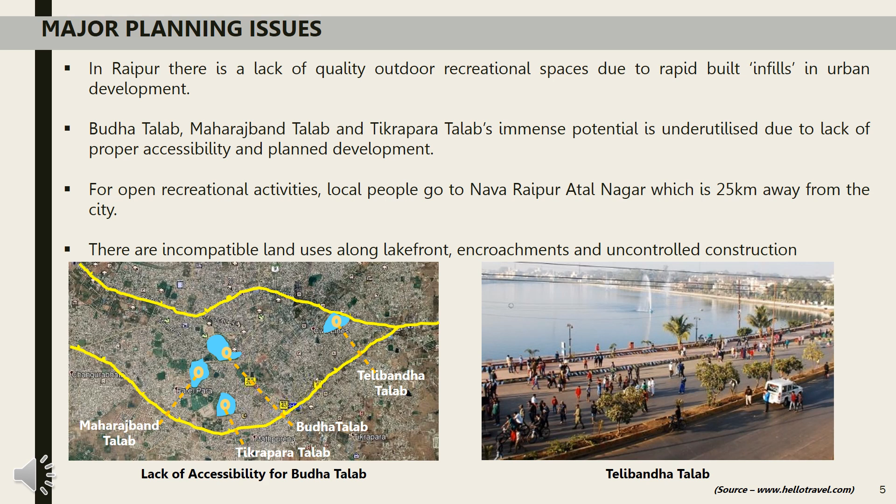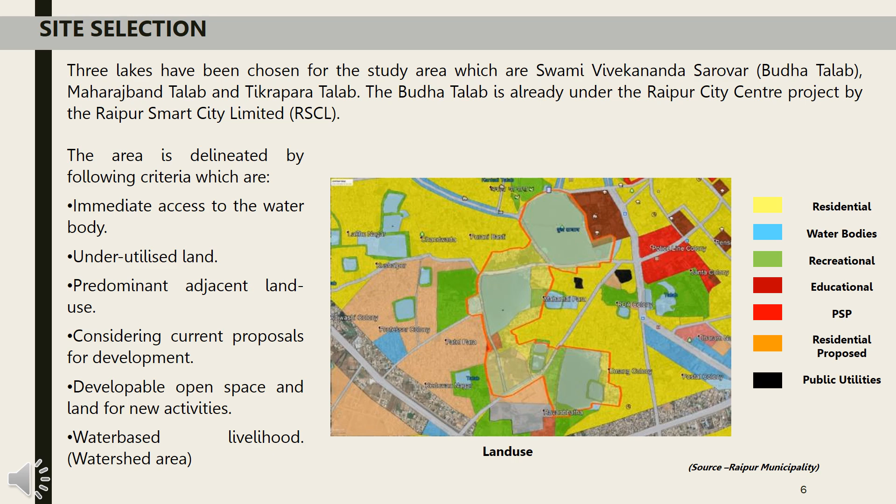The planning area is shown in the red boundary, which was selected considering criteria like adjacent land use, presence of underutilized land, immediate land-water interface, and proposals for development in the future. The aim of the thesis was to develop the three lakes into a tourist destination, following a systematic approach by planning outdoor recreational activities and urban design solutions.

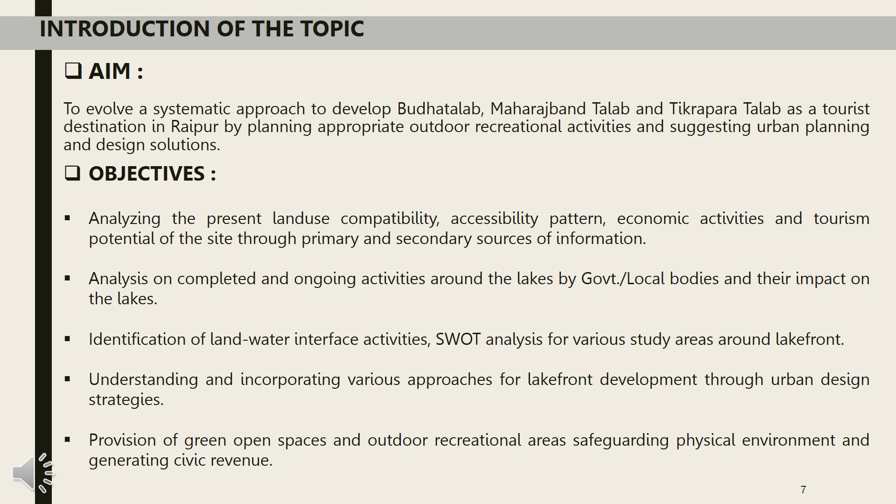The objectives to achieve the aim include analyzing the present land use, site potentials, study of completed or ongoing projects, data collection and analysis, and finally provision of green spaces and recreational areas. Scope of the thesis involves strategic measures, improved accessibility to the lakes, utilization of potentials and preparation of broad level plans with some detailed action area plans.

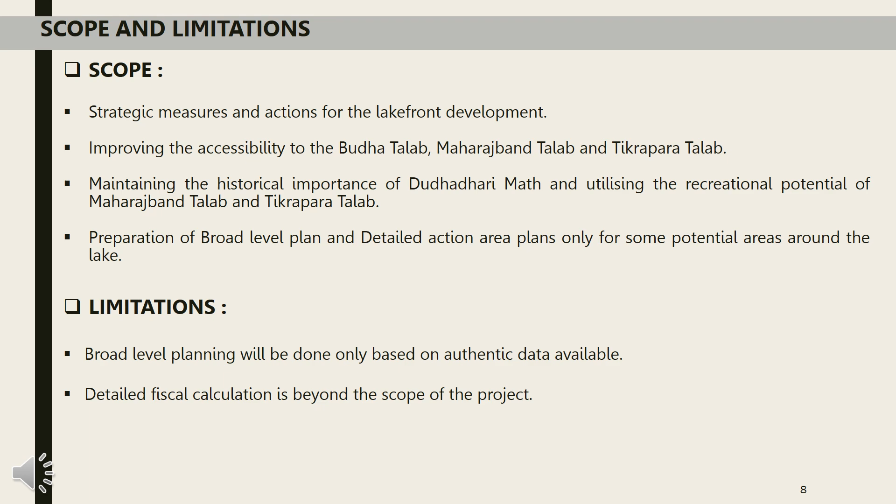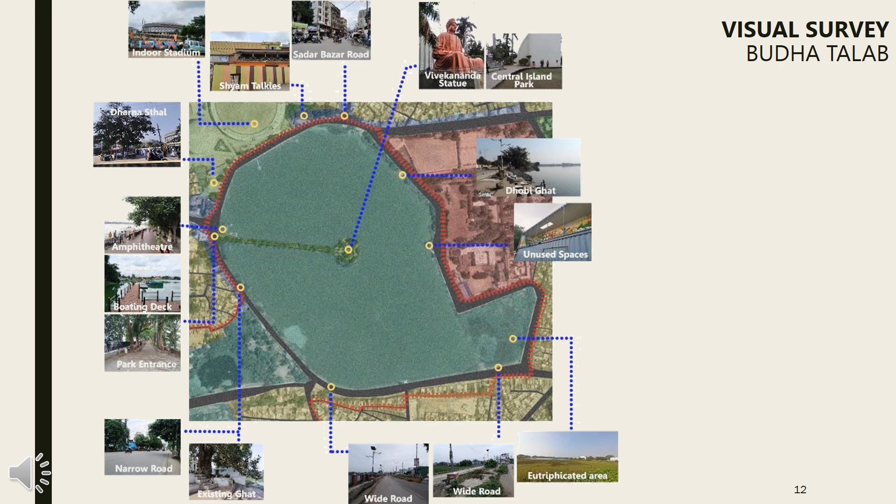This is the visual survey around Budha Talab showing the existing situation of the place. As we can see, the lake is already an attraction point for visitors with the presence of Central Island Park, indoor stadium, Shyam Talkies, boating deck and walkway around the lake. This is the visual survey for Maharajband Talab. The area is mostly surrounded by residential development and has Dudhadhari Math at the south.

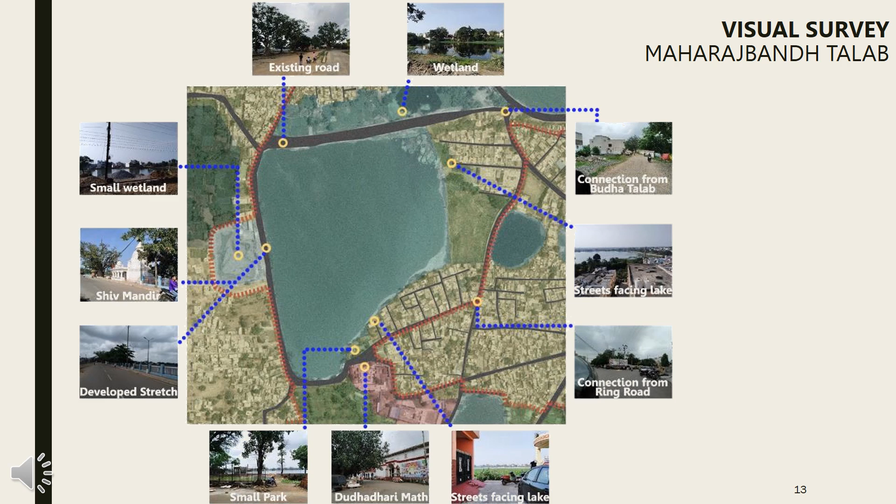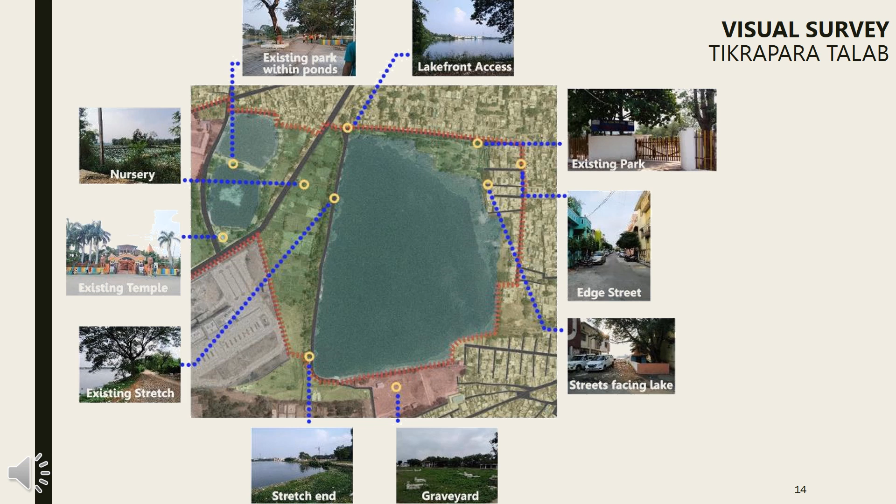The existing scenario of Tikrapara Talab is also similar to Maharajband Talab. Its condition is worse than the other two lakes due to no development around the lake, followed by low visual and physical access. It has an existing park at the north and a graveyard at the south.

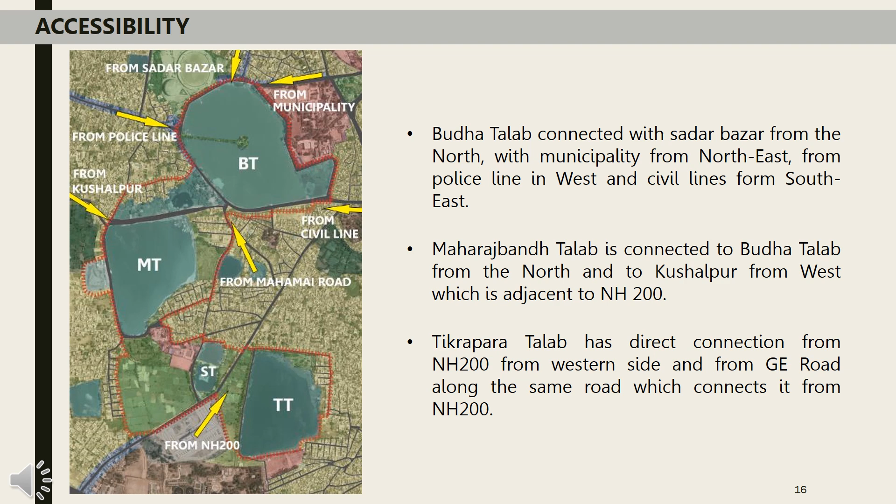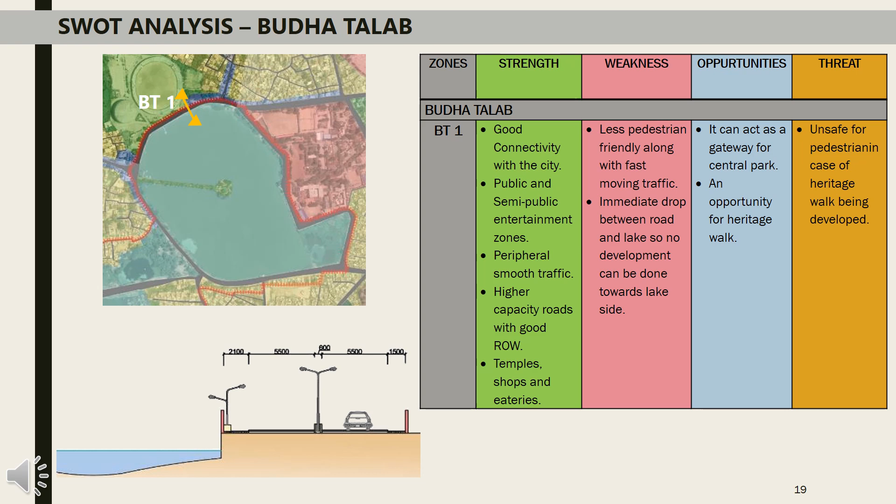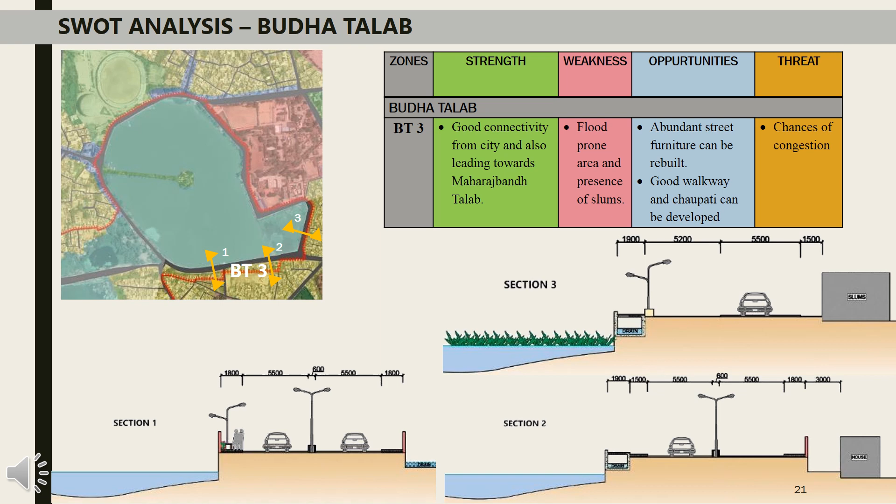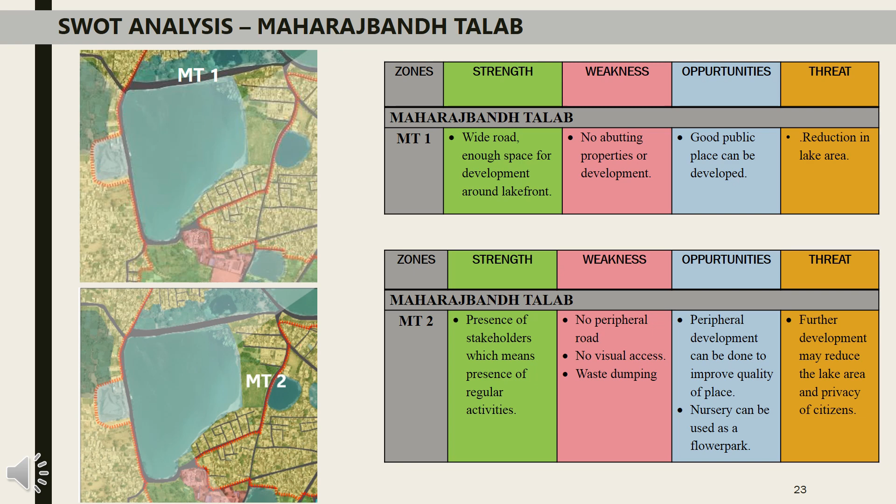After data collection and visual survey, SWOT analysis has been done for each lake. It was done by dividing all three lakes into further subzones based on their characteristics. SWOT analysis has been done for each subzone individually. These were the SWOT analyses for subzones of Budha Talab. This is the SWOT analysis for subzones of Maharajband Talab. And this is the SWOT analysis for subzones of Tikrapara Talab.

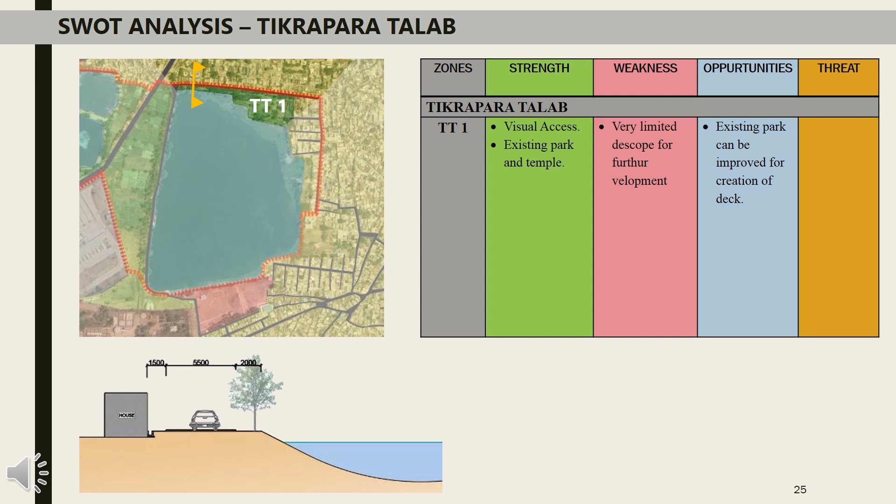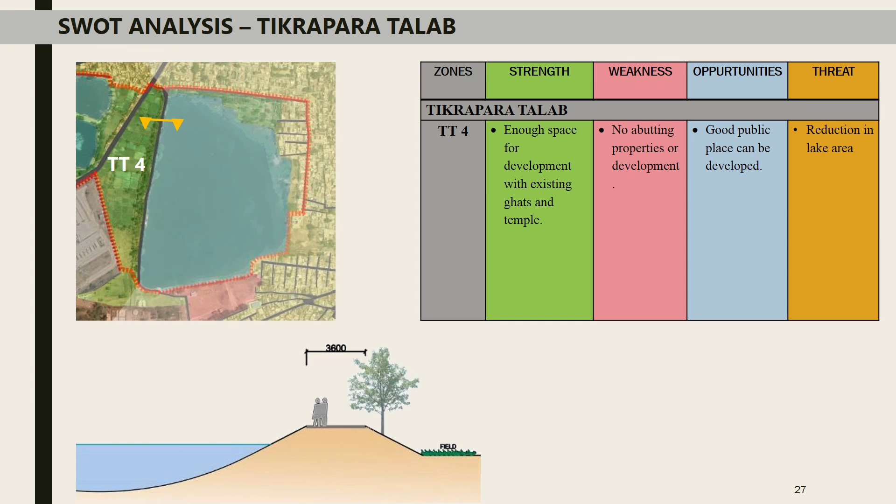Household survey near Budha Talab was taken to find out the present relationship between the residents and the lake, also to find out how they are affected by the lake being a tourist spot. The priority of development for residents are mainly improvement of water quality and solid waste management around the lake.

Household survey near Maharajbandh Talab was taken to find out the present use of lake, the major problems and future potential for various zones. The major priority of development for them is improvement of water quality and solid waste management around the lake.

Similarly, household survey near Tikrapara Talab was done to find out the present use of lake, the major problems and future potential for various zones. The major priority of development for them is improvement of water quality, solid waste management around the lake, new recreational areas and commercial area development.

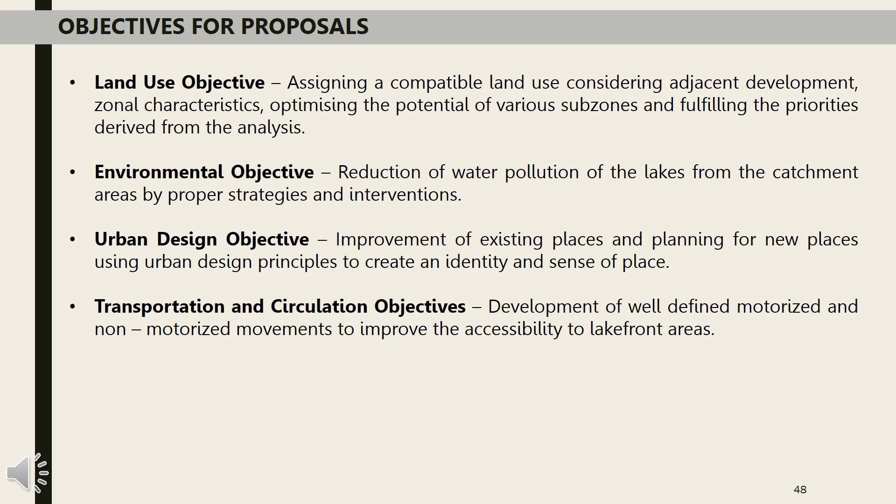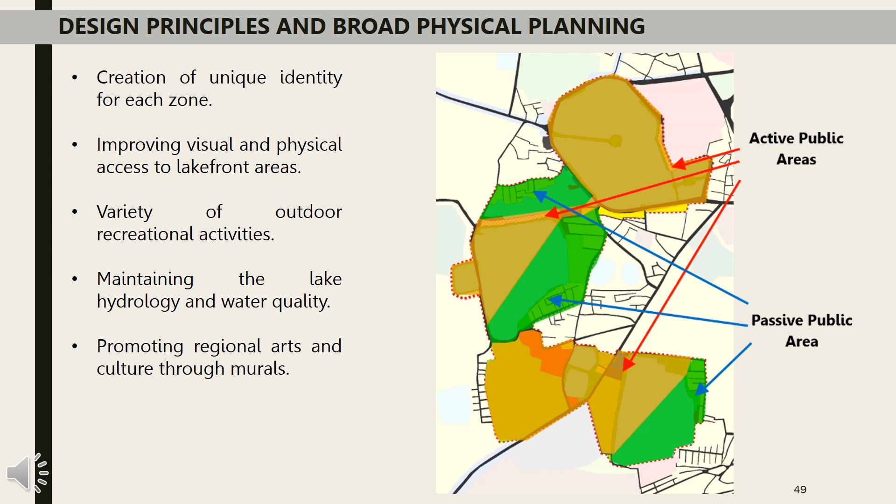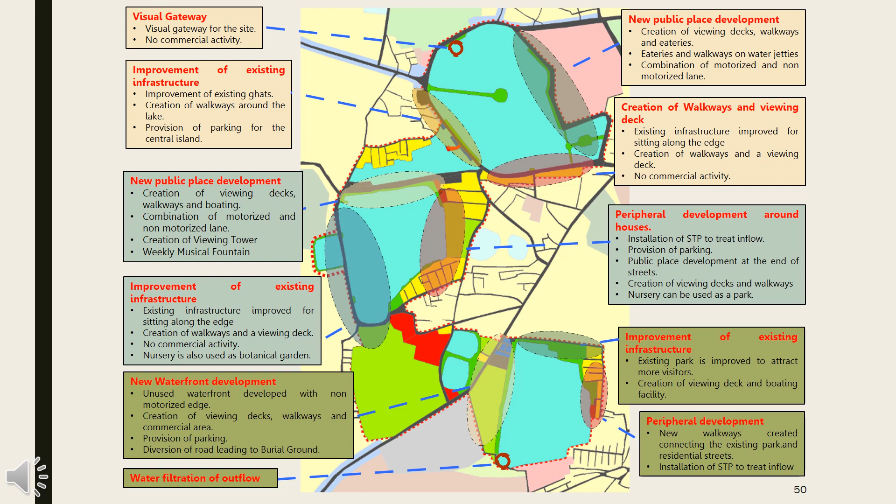After getting the preference for development activities, interventions were taken in form of proposals and recommendations. Proposal objectives were for 4 fields, which were land use, environment, urban design and transportation. Planning area was broadly divided into 2 types, active public areas with new recreational activities and passive public areas with less visitor interaction, while incorporating some design principles. The broad planning strategies for various subzones around the lakes are formulated based on data analysis. Based on these strategies only, proposals were given for each subzone.

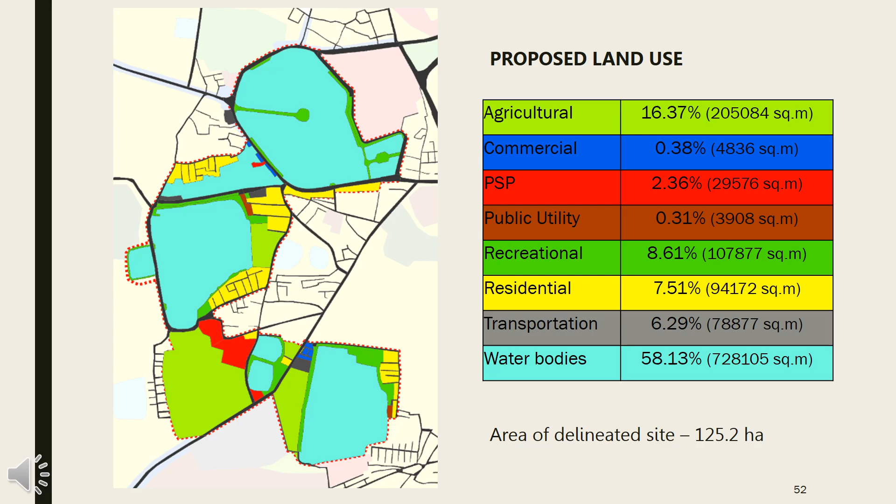In the proposed land use, recreational area has been increased along with the introduction of public utilities and commercial area. Recreational area in total increased from 1.8% to 8.6% and commercial land of 4836 square meters has been proposed. This is the proposed land use map of the planning area with share of each land use given. Development proposals in the planning area follow some development guidelines which are formed considering aspects like natural features and landform, built-up form, urban landscape, open spaces and circulation.

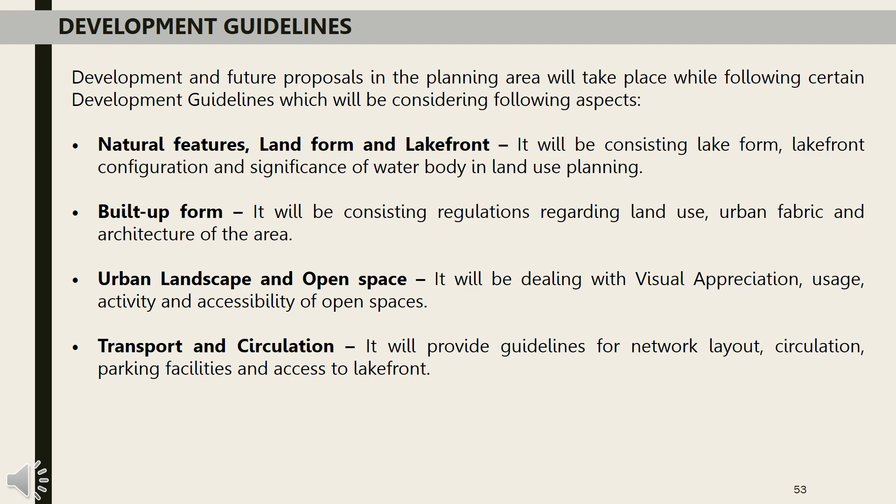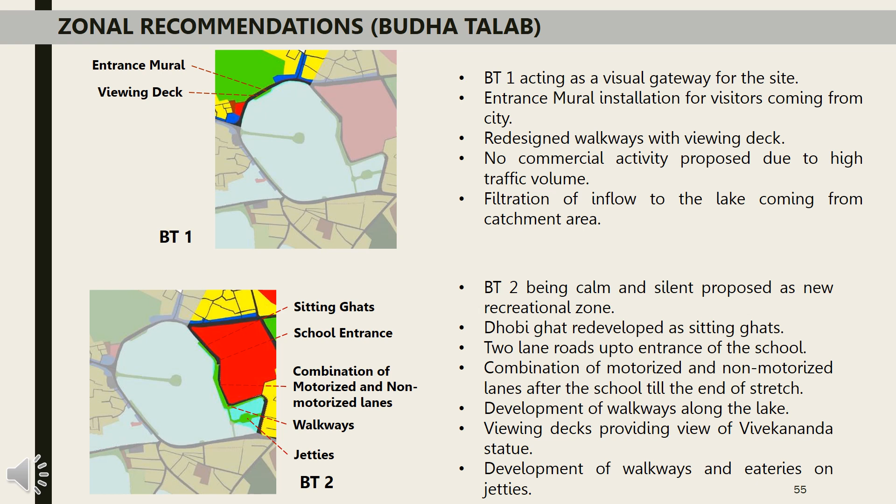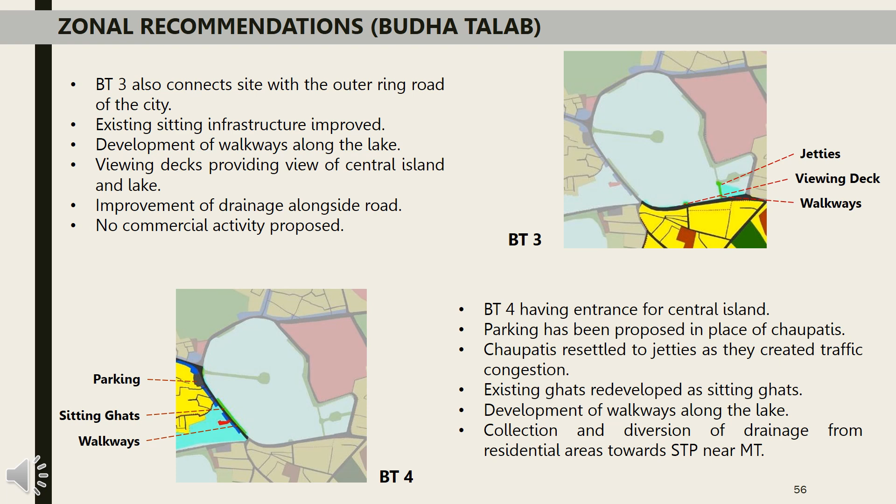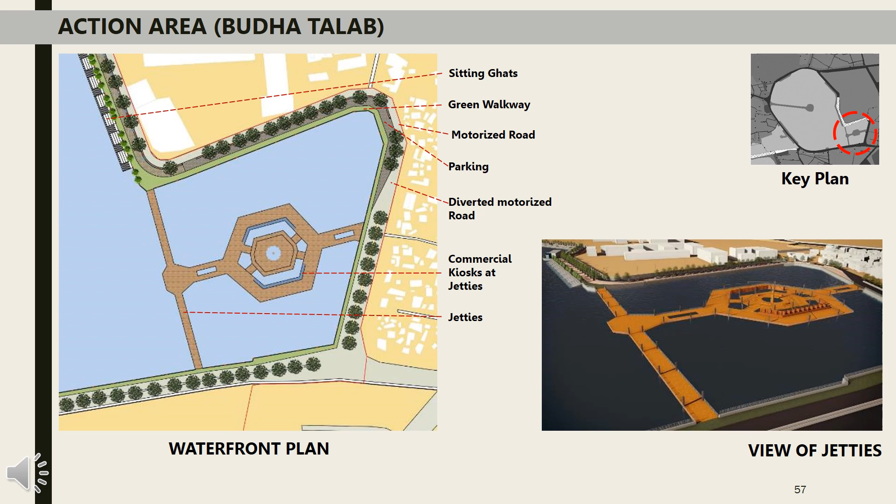Now this is the detailed plan of Zone BT2. Motorized road has been diverted to create a lane for parking. Further, that lane will be closed and will be used as a non-motorized lane along with the green walkway. The jetties constructed on the lake will have commercial kiosks and eateries. This is the waterfront stretch plan showing the sitting ghats, green walkway and commercial street. The ghats will provide an interactive experience with the water. These are the overall proposals for the Maharajbandh Talab.

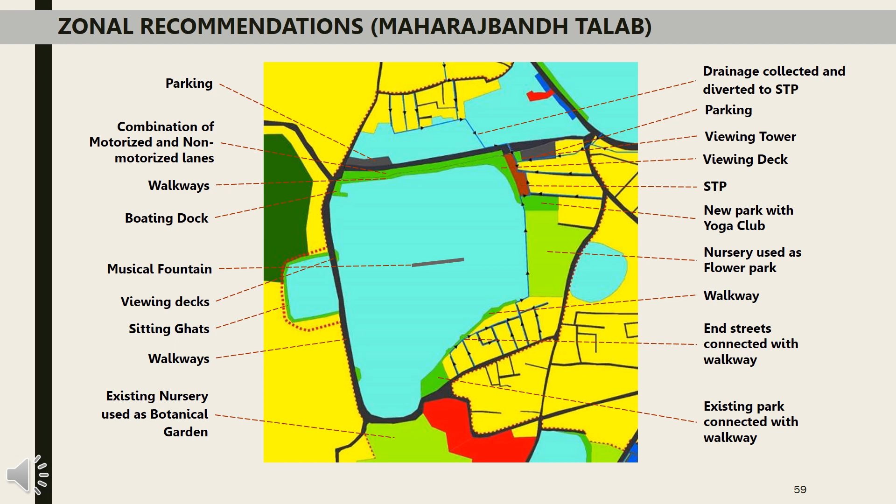In Zone MT3, existing sitting infrastructure along the lakefront will be improved with 2 viewing decks in between. The nursery present at the south of the lake can be used as a botanical garden.

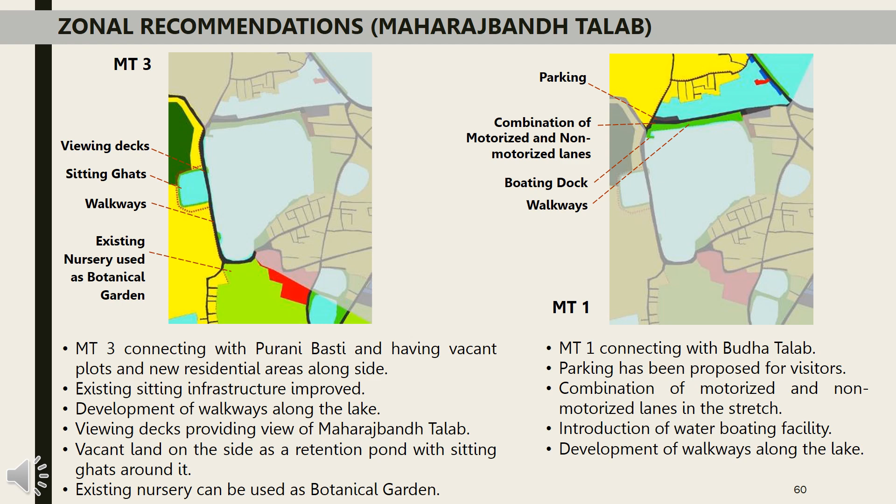MT1 will be developed as a new recreational zone with development of walkways and sitting ghats. It will also have a combination of motorized and non-motorized roads with a separate parking facility. A new boating facility has been provided in this zone.

MT2, on the other hand, has mainly residential areas, so it is designed as a passive public area. On the top of the zone, parking has been given along with a viewing tower which can provide the aerial view of the Budha Talab and Maharajbandh Talab. Beneath it, an STP has been proposed to treat the inflow coming into the lake.

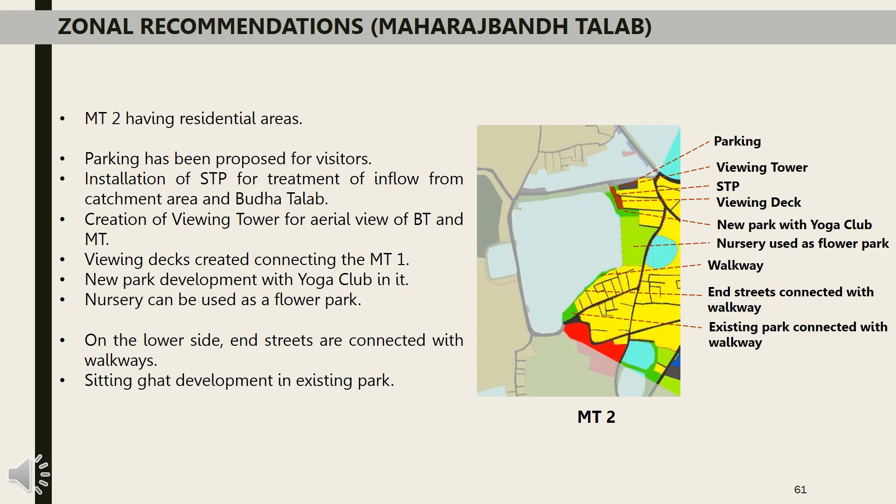Near the residential area, a new park has been proposed which can be used by the yoga club of the residents nearby. It is also connected to the walkways through a viewing deck. On the lower side, the existing park has been developed with walkways connecting the ends of the streets.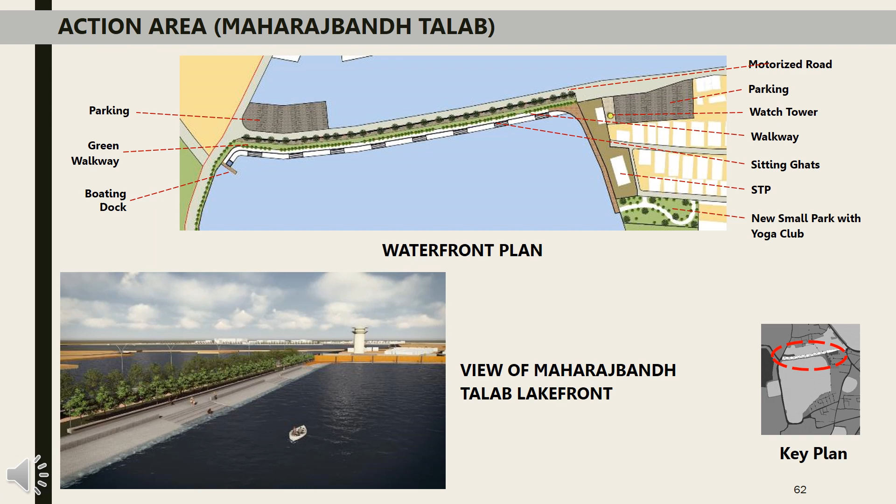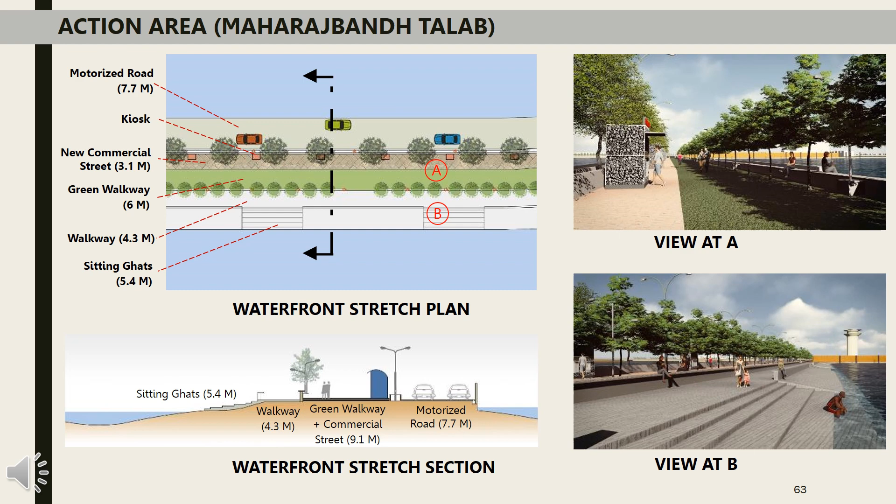This is the detailed plan of MT1 showing the combination of lanes, green walkways, parking locations, boating dock, STP and viewing tower. This is the waterfront stretch plan showing the sitting ghats, green walkway and commercial street or non-motorized lane. Similar to Budha Talab, the ghats will provide an interactive experience with the water.

Overall proposals of Tikrapara Talab include its surroundings and small ponds near Shiv Mandir at the west also. Zones TT1 and TT2 have an existing park and residential area. So here, the existing park has been developed and connected to the walkways created at the end of the streets.

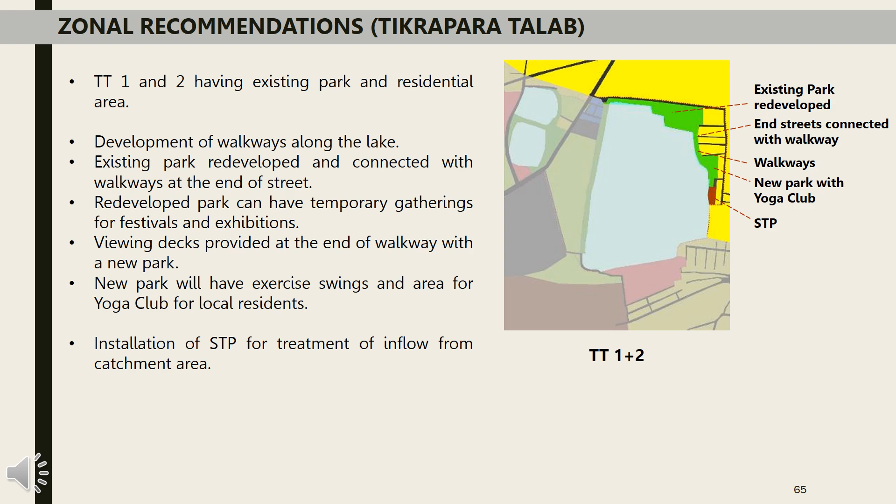At the end of the walkway, a new park has been proposed with exercise swings. At the end, an STP has been proposed to treat the inflow coming from the catchment area. Zone TT3 has a graveyard, so no intervention has been taken for that zone.

In zone TT4, first, a new commercial area has been given for residents nearby. Then near Shiv Mandir, existing parks near ponds have been redeveloped and slums were resettled to improve visual access. On the Tikrapara stretch, a new lakefront has been proposed having its access from the main road. The entrance will have a parking facility.

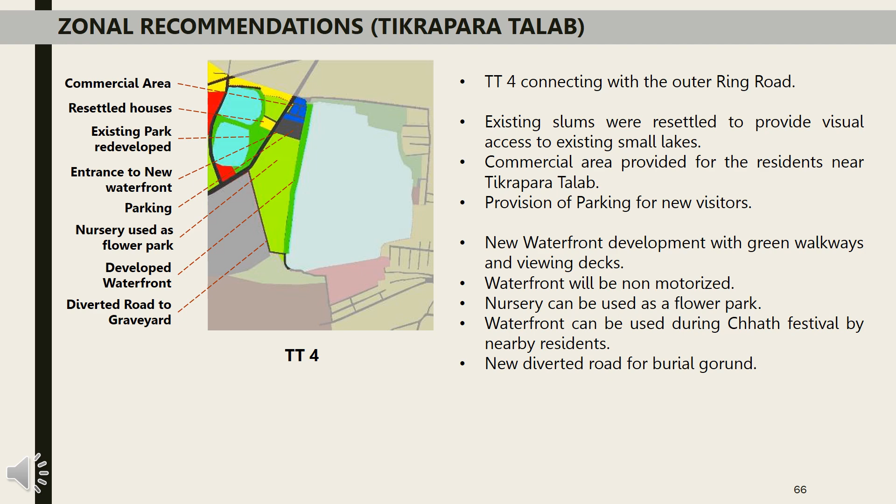The lakefront will be non-motorized and the existing road towards the graveyard has been diverted on the southern corner for more direct access. This is the detailed plan for the new lakefront development. It shows the newly developed lakefront, commercial area, and existing park redeveloped with walkways at the end of residential streets leading towards the new park.

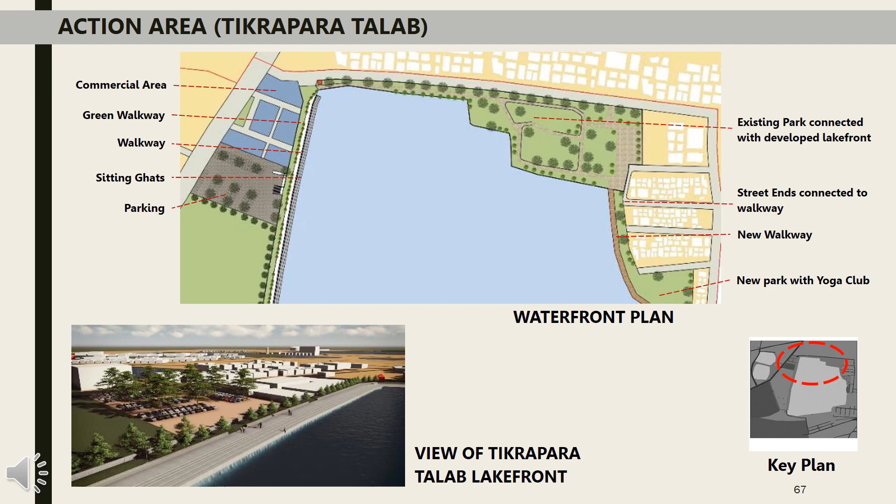This is the waterfront stretch plan showing the sitting ghats, green walkway and parking. Similar to the other two lakes, the ghats will provide an interactive experience with the water.

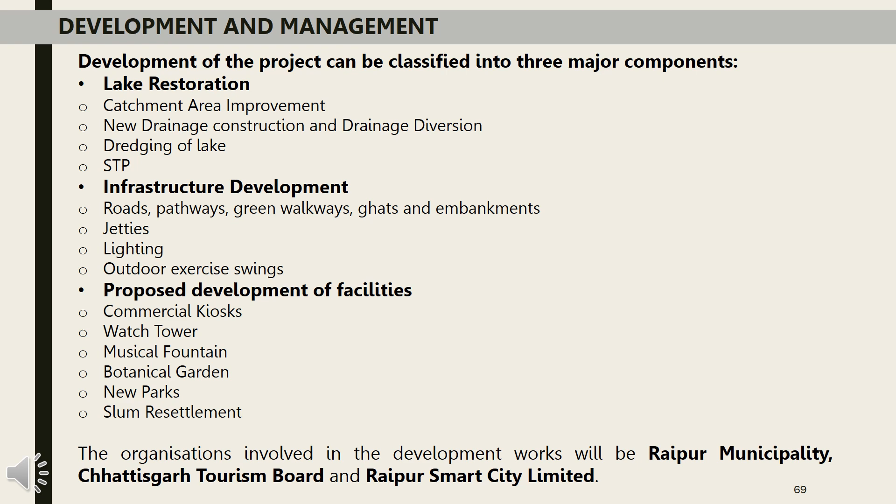For the development of the project, the overall project can be classified into three major components, which are lake restoration, infrastructure development and proposed facilities development. The organizations involved in the development works will be Raipur Municipality, Chhattisgarh Tourism Board and Raipur Smart City Limited. The expenditure of the projects will be for the three development components explained here and operation and maintenance works over time.

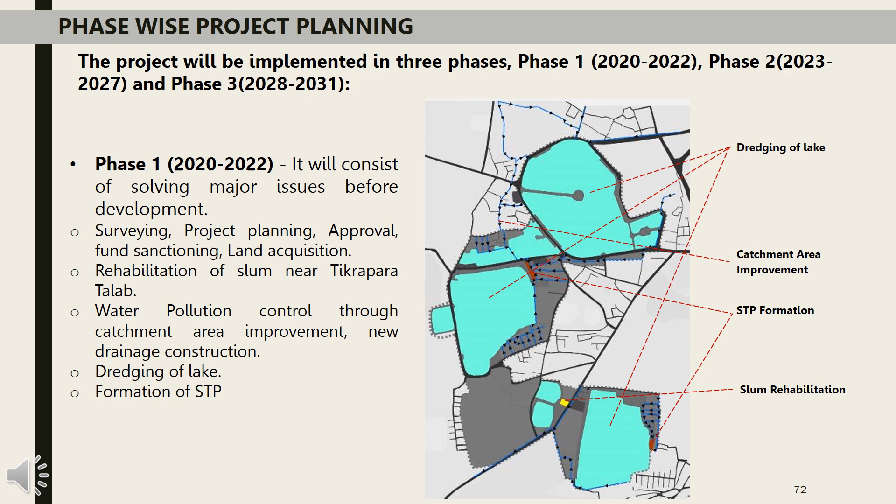For implementation of the project, phase-wise planning has been done in three phases. Phase 1 will be from 2020 to 2022, which will focus mainly on solving major issues before development like water pollution control, slum resettlement, etc. Phase 2 will be from 2023 to 2027 and it will consist of new development works like construction of ghats,